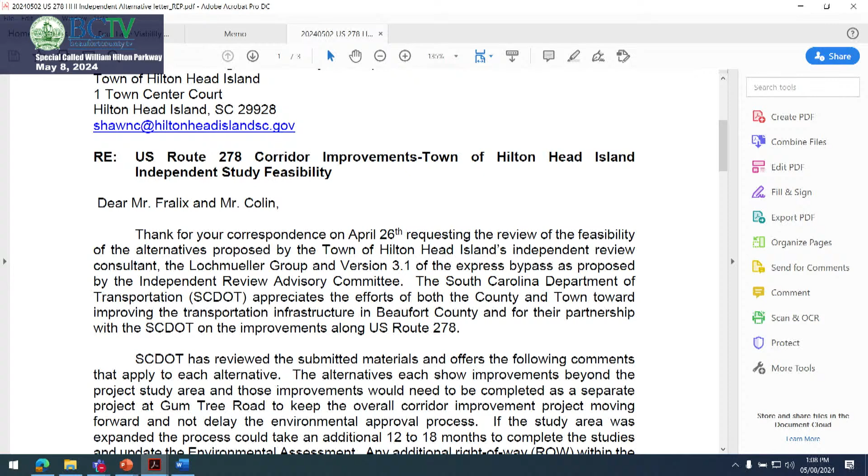The alternatives included number 1, the current Beaufort County proposed alternative. Number 2, which included bow ties, the roundabouts at Squire Pope, Chamberlain, and Spanish Wells, and Wild Horse Road. Number 3, the echelon or center turn elevated at one of 2 intersections in the Stoney community. And alternative number 4, the elevated bypass through the entirety of the Stoney community.

The other alternative, not recommended by Lochmueller but recommended for submission to SCDOT for response, was the Express Bypass, 3.1, that has been discussed for some time. That bypass impacts property to the southern portion of the traditional cultural property in the Stoney community and ties back into the Cross Island business route near Honey Horn, where Honey Horn and Coastal Discovery Museum properties are.

Those alternatives were submitted to SCDOT. They reviewed them in advance of the meeting and then provided feedback at the meeting on the alternatives. They also provided information related to bridge rehab versus a reconstruction or new bridge, which I'll share after we talk through this letter. They did a thorough review of the alternatives to provide technical evaluation and feedback related to feasibility or viability of the projects or alternatives to advance in the project.

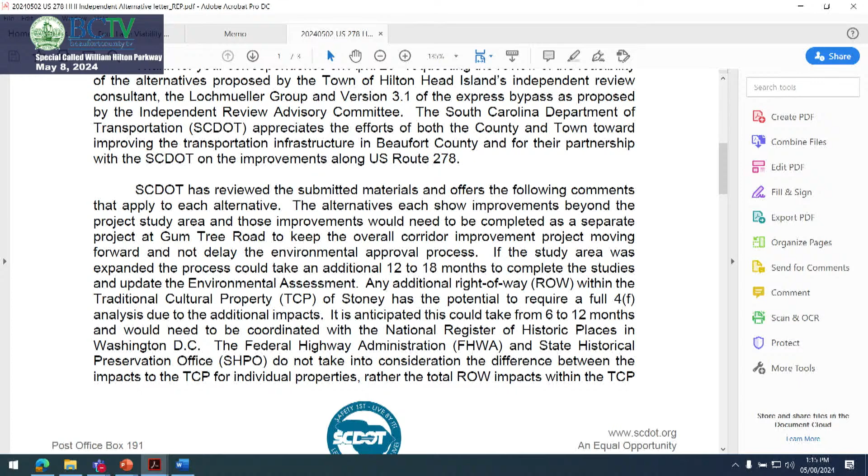There was sensitivity around the traditional cultural property. There is no distinction between town or publicly owned property and privately owned property as it relates to impact within that traditional cultural property designation and area. They've been coordinating with the State Historical Preservation Office to understand the difference between those impacts within the TCP.

As for specific feedback received on the alternatives, I'm going to go through - they had exceptions or concerns with alternatives 2, 3, 4, and the express bypass, and I'll run through those. It's the feedback that came directly from them. So there was discussion on May 1st.

This letter was drafted and submitted officially by their Deputy Secretary of Transportation and Chief Engineer. So alternative 2, which included the bow ties at Squire Pope and Spanish Wells roads, would require additional right-of-way, which Lochmueller provided in their presentation.

Due to the increase in right-of-way within this traditional cultural property, this alternative would be eliminated, or the feasibility of advancement would be really low.

They had concern with the potential issues around the roundabout volumes needed for dual lane, so it's maybe not just as easy as making a right to make a left - the volumes experienced in those areas would require some additional capacity in the roundabouts.

They thought the cost estimate and the construction duration were a little low to add those 4 roundabouts in, as it also increases the right-of-way phase of the project as well.

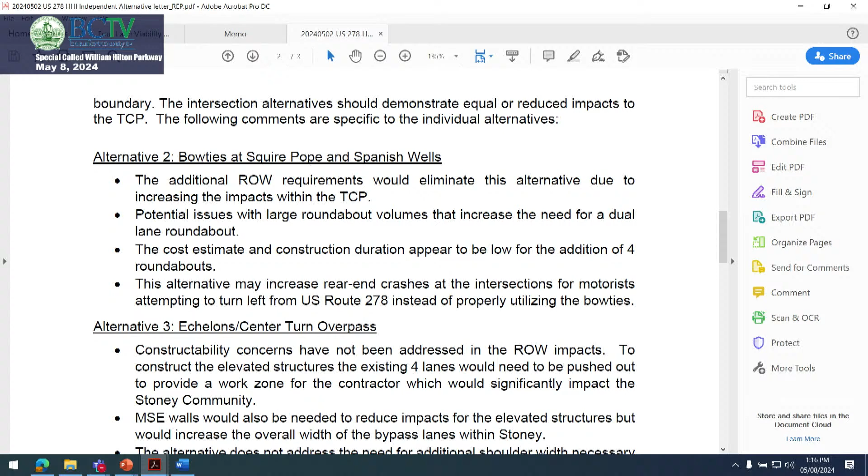They were concerned about potential increase in rear-end crashes at intersections for those not used to using this travel pattern to traverse through the area. So that was their feedback on alternative 2.

Alternative 3, the echelons and the center turn overpass - there was some concern that the elevated structures and substructure needed to support that would require additional right-of-way, since piers and columns would require that other travel lanes be pushed further out to the side.

And that would have impacted the Stoney community. So they're concerned about the TCP and additional right-of-way needs.

MSE walls, which are mechanically stabilized earth walls, would also have additional impacts for elevated structures and potentially increase the overall width within the Stoney community.

There was concern about the shoulder width, as you have the at-grade roadway and require shoulder width outside of those substructures to support the elevated area. That could have some additional impact.

They also thought the cost estimate for this elevated area for the echelon or center turn at one of the two intersections would cost more than what the estimate had shown from the Lochmueller evaluation.

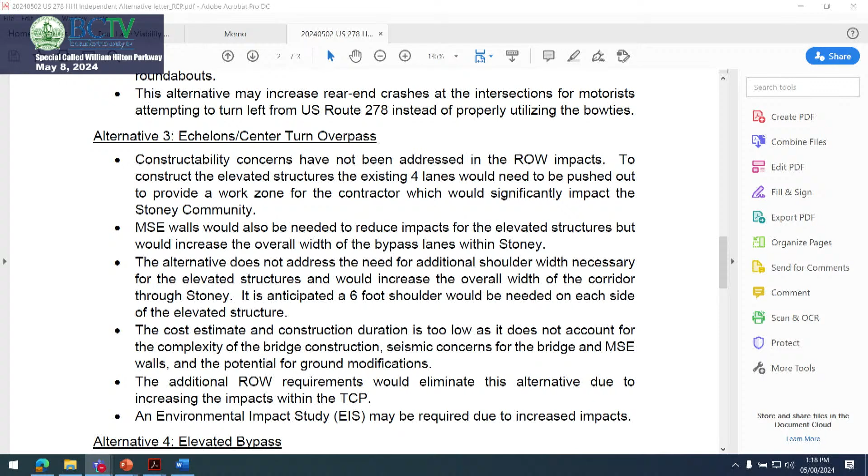The elevated bypass, again, it would begin at the causeway to Hilton Head Island and run through the entirety of the Stoney corridor, then tie into Business Route and the Cross Island Parkway.

Again, they had some additional concerns here with an elevated roadway - a substructure and superstructure requiring support that would squeeze additional needs and right-of-way impacts to the outside of the existing roadway.

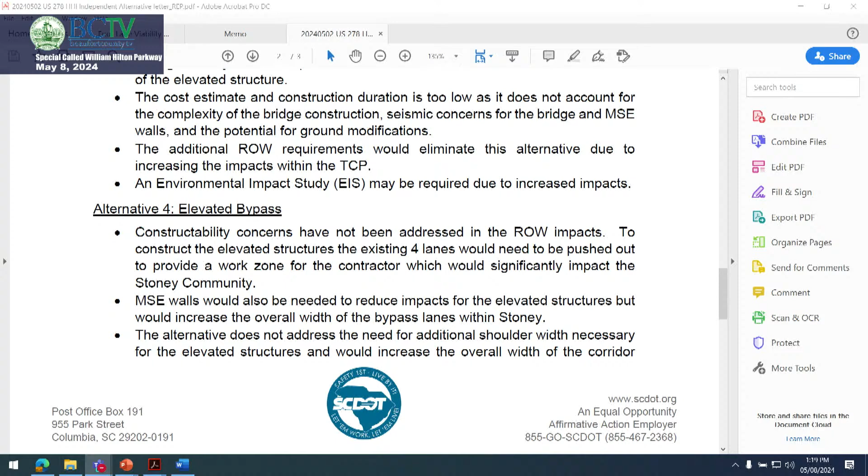This would also require work zones for contractors to operate, and the same applies to mechanically stabilized earth walls needed to support the super elevation, as well as shoulder width. There was concern these would require additional width within the corridor, requiring more right-of-way through Stoney.

They also thought the cost estimate and construction duration here were too low. If you recall, it was 425, 430 for alternative 1. It was 575... so even at a $150 million increased cost, they thought that was too low.

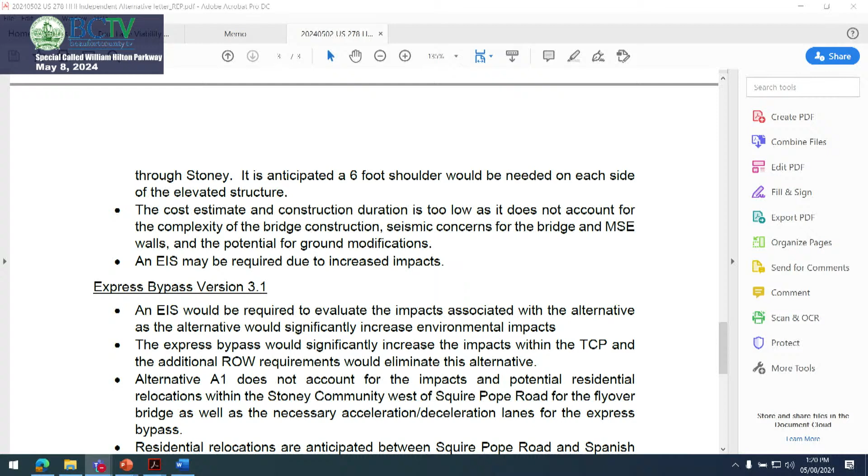This adds a lot of complexity once you start getting into superstructure and super elevation for an elevated roadway through that area, adding complexity to the construction period and the overall execution of the project. It also adds additional seismic concerns once you have that component, and they thought a full EIS might be required if this alternative was considered.

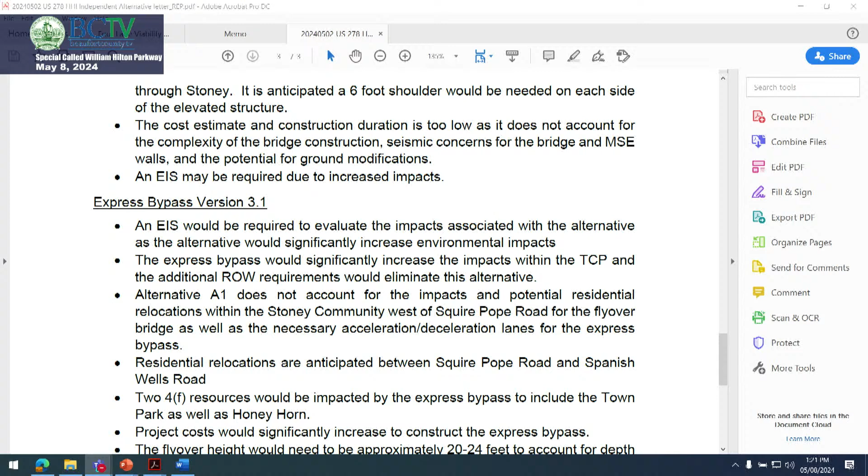Alternatives 2, 3, and 4 were rated very low on feasibility or viability to advance through the NEPA process and get through Federal Highways while minimizing impacts. Any questions on those? Those were the three Lochmueller alternatives they provided feedback on, before I go through the express bypass.

The cost estimate is based on the configuration included in the EA. It's a 6-lane bridge with two 10-foot shoulders, one in each direction, on the outside, and 6-foot shoulders on the interior — the 10-foot shoulders have been reduced. It includes a 12-foot bike and pedestrian pathway along the bridge, as one bridge with 6 lanes total.

It flies over Pinckney Island but does not land on it, due to safety concerns expressed by Fish and Wildlife. It includes a 6-lane segment once you land on Jenkins Island, continuing all the way through the Squire Pope intersection, which includes turn lanes — 2 turn lanes onto Squire Pope from Hilton Parkway and 2 right turn lanes off.

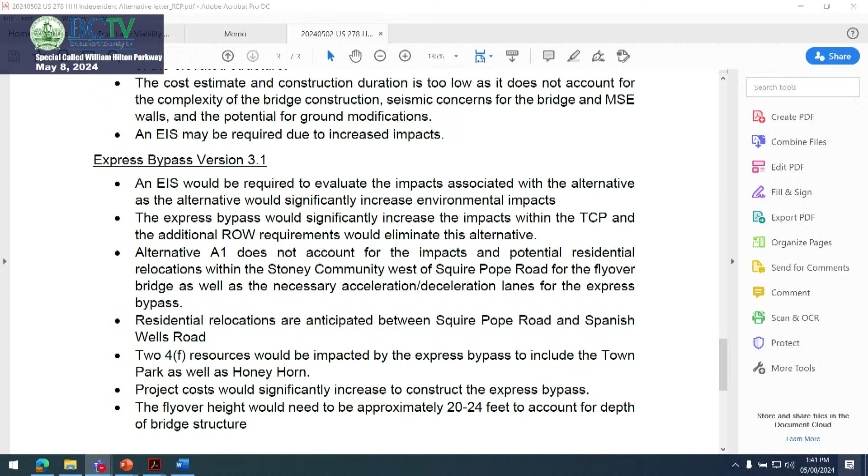As you can see, alternatives 2, 3, and 4 have very low feasibility to advance. There are statements from SCDOT that they'd be eliminated, as is the case with the express bypass that was presented. What was submitted was exactly what was submitted to the town for consideration, and this is a response from SCDOT. They don't believe that the express bypass is a viable option on many accounts.

Both property impact, environmental impact, cost, and time frame would not advance this. Federal Highways would likely reject this option if submitted due to the additional impact.

It would go against their objective of avoiding property impacts, minimizing property impacts, and mitigating in that order. This would have additional property impacts, potential relocations of residential, as you can see there, and would not be an alternative that they would advance.

Federal Highways would likely reject it if submitted because there are less impactful alternatives that have been developed. This is from SCDOT, and I've paraphrased a little bit from discussion related to that conversation with SCDOT. I'd ask Nate to share any of their professional engineering opinion on the feasibility of this alternative advancing.

Just, I don't want to rain on your parade, Sean, but if we are talking about an independent consultant doing the work and we open up the door to have in-depth conversations with SCDOT, and the consultant is privy to all this information, the views of SCDOT, now draw your conclusions.

Just so you know, Dietrich, the information we're going to be showing you from our perspective was before we have seen anything with that. Chad or Sean sent me an email with this document today, so we had not had any conversations at all. These would be our independent viewpoints on the bypass.

I do want to point out that I cannot modify the scope of work just at the direction of this committee. It was approved by town council. The committee's charge was for the work with a consultant to move forward materially consistent with the scope of work that they created. Before I would execute a contract amendment to evaluate this alternative, I would have to ask town council if they agreed. You made a recommendation on a scope of work to council, they approved it. You're changing the scope of work. I need to make sure that council agrees with that step. So I just want to make sure the committee is aware of that.

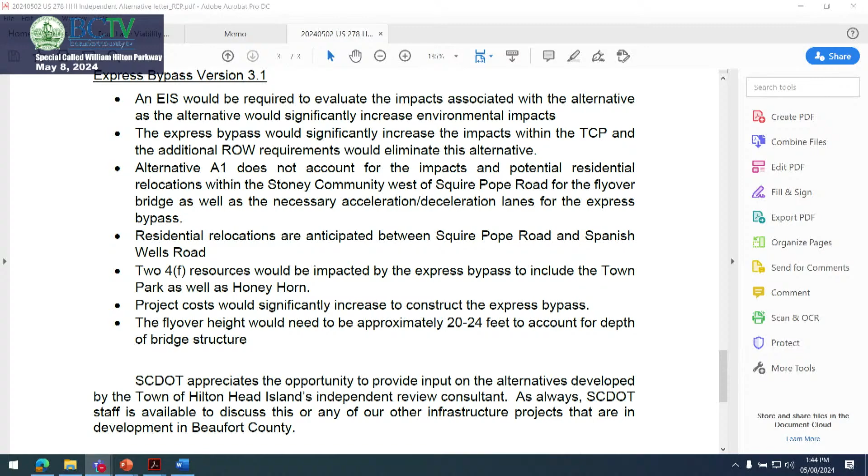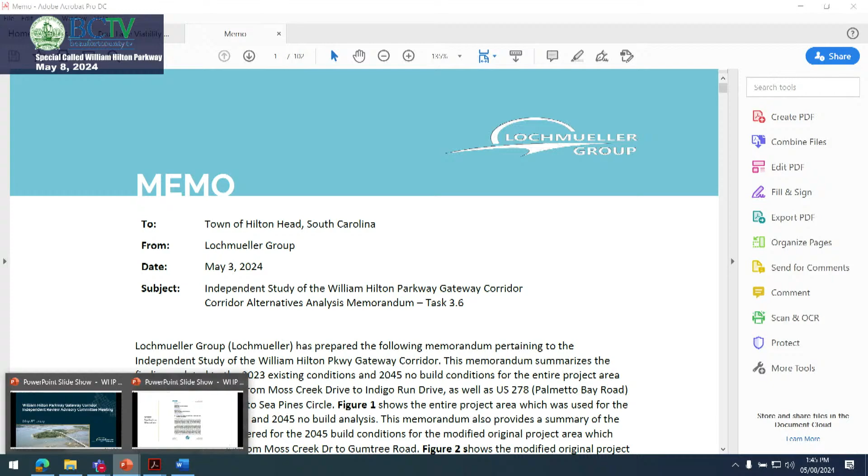So that's the letter and the response. I wanted to make sure I brought up the letter specifically on their letterhead because that's what's provided. I'm going to go through just very briefly a couple more things.

In addition to the alternatives which the committee asked us to vet through SCDOT, there's been some questions related to a bridge rehab versus a new bridge. We did ask SCDOT what are the design costs and construction implications related to bridge rehabilitation versus a new bridge, and they shared some feedback with us.

The existing deficient bridge, the eastbound Mackay Creek Bridge, is approaching 70 years in its life cycle. Bridge design and life cycle is about 70 to 75 years, so it's nearing the end, if it hasn't already, it's very close to the end of its life cycle. They said that bridge rehabilitation could be performed, but their preference is for a new bridge, and there's many reasons for that. As they looked at the substructure, the superstructure, and the bridge deck, there are significant concerns with all elements. The cost to rehabilitate the bridge would likely approach the cost of a brand new bridge.

A new bridge could be built with minimal traffic impacts. It would be built offline and constructed, and then there would be a slight transition to move traffic onto the new bridge before the old bridge would be demolished. There's some significance in that because it provides minimal impact to traffic operations during the construction period. They mentioned that a rehabilitation of the existing bridge could cause lane closures and delay to motorists during that construction period. And then finally, segmenting the project into rehabilitation of 4 bridges would create additional time on overall construction, likely increase project cost, and result in differing life cycles of the bridges that are there.

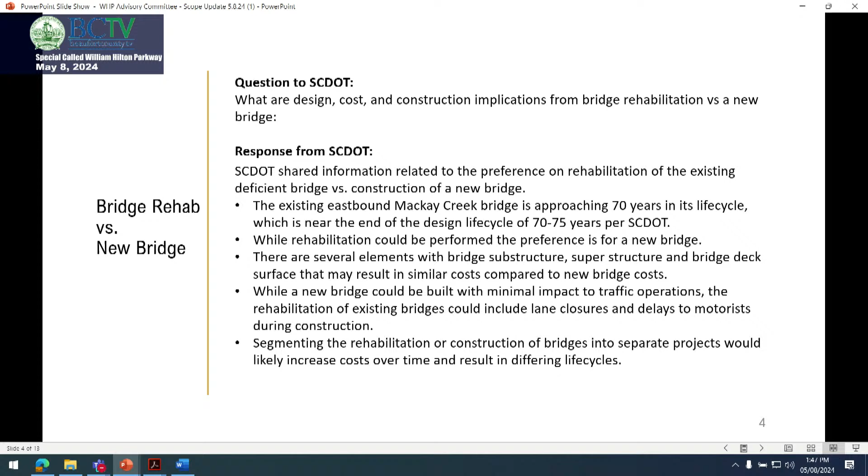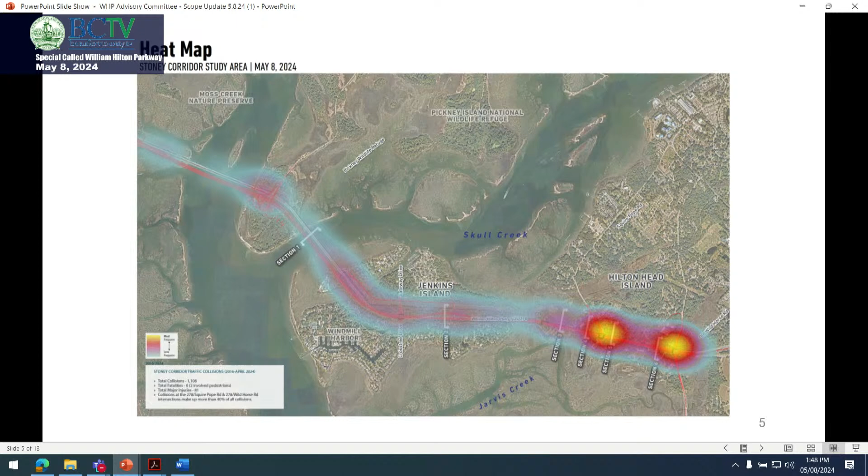I did want to point out a couple of other things. This is a heat map that shows traffic incidents or collisions from 2016 to 2024. As you can see, there's a significant amount as you go through the bridge corridor section, and then also as you get into the Stoney community.

Specific statistics in this 4.1 mile section are that over 8 years, there's been 1,108 total collisions, about 140 a year. There's been 6 fatalities, 2 involving pedestrians, and there's been 81, so about 10 major injuries a year in this segment. When we think back on why we're trying to advance a project, without a project, we don't have a mechanism to help provide some improvements in this area, including trying to slow speeds, some traffic calming, and have a safer transportation system through this area.

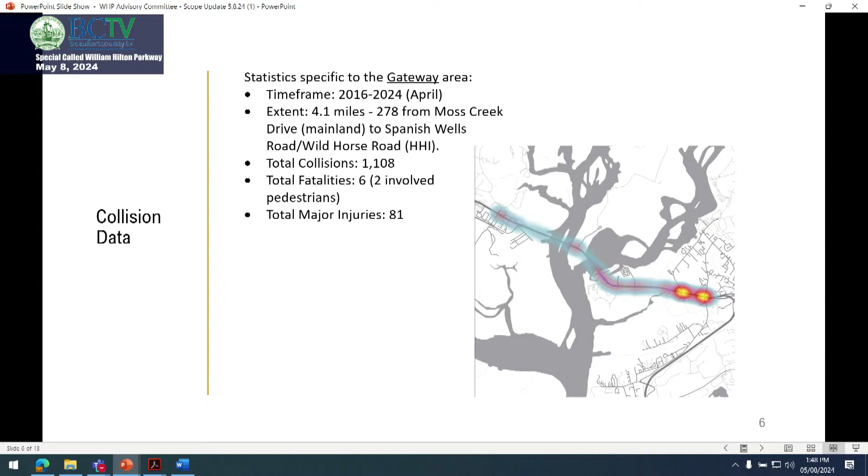I do want to make sure that we understand, again, the council authorized scope of work was to make sure that we had a consultant review all the assumptions, the methodologies, and come up with what they believe were alternatives to advance for this project.

They were encouraged to develop their own ideas and recommend their own alternatives. I think they've done that. And this was to be independent. The proposed plans have to pass NEPA. This was right from the ordinance adopting the scope of work. And that any additional impacts, including safety and other items that are considered by federal highways, would need to be considered.

So I think what Lochmueller has done is look at the alternatives and also the viability and ability for them to move through the NEPA process, and be alternatives that would be supported by federal highways. And then the final thing is anticipation that this would not take longer than about 6 months to complete. And then there's all of the scope tasks that are below that.

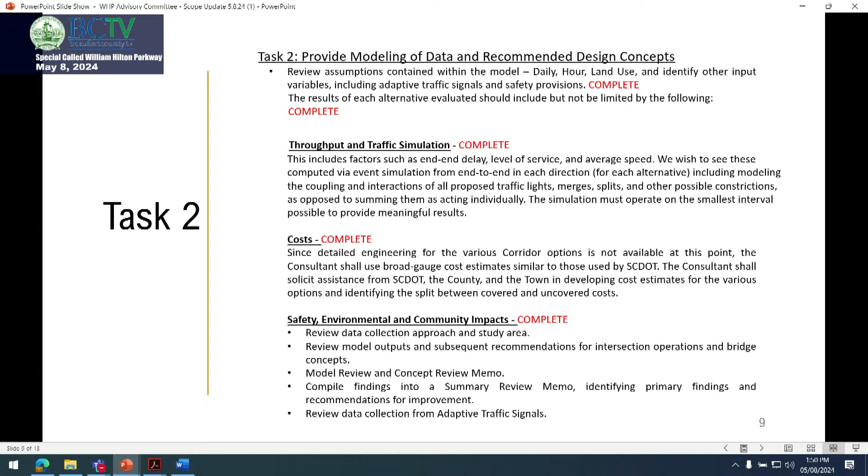I'm just going to go through this at a high level. All items in task 1, other than the ongoing meetings and updates, have been completed. In task 2, the modeling data and recommended design concepts have all been complete. In task 3, the model and

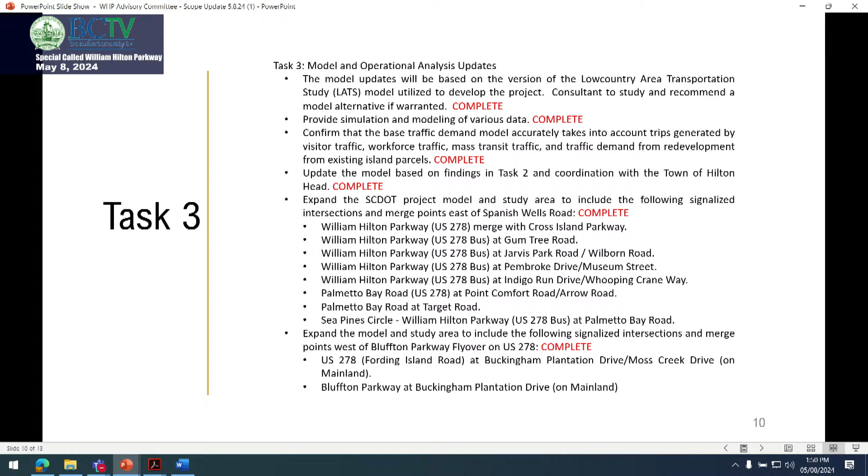operational analysis to lead to the recommended alternatives from Lochmueller have been complete. They have also expanded the study area beyond the Spanish Wells intersection to Gumtree in this modified project area, but also have added the other intersections downstream, both on the business route and on the Cross Island route to Sea Pines Circle. So it's been complete. We don't have all the results on that next segment, but they have expanded it.

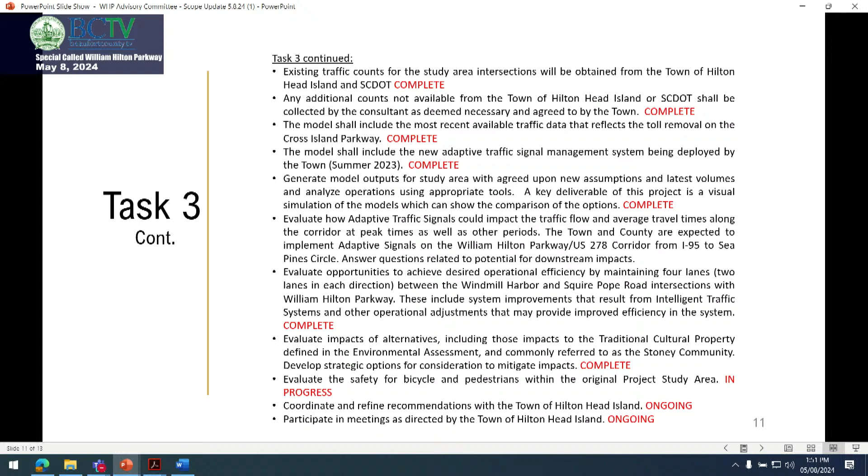Task 3, with additional items here that have been considered, adaptive traffic signals. They've looked at and provided you model outputs from the Synchro that they've run. They've got data from the VISSIM at the last meeting. They've looked at impacts to the TCP and have provided you 4 alternatives that they believe were viable to advance.

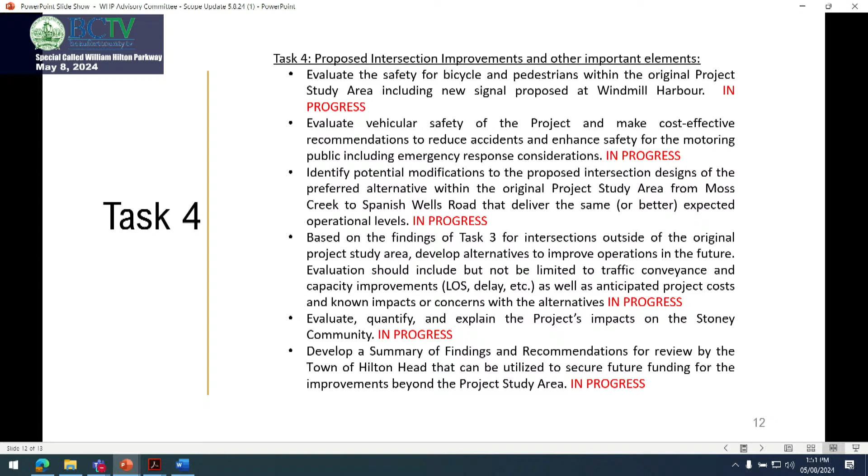They're now moving into task 4. The contract was segmented to try to get information from the Moss Creek through the Gumtree area, because that's the area that's slightly larger than what was included in the NEPA process. And so I think they've provided that information consistent with the directive and the scope of work that was in the contract. They'll continue on task 4 to look at some additional elements and then the downstream impacts to those other intersections. And then task 5 would be delivery and presentation of their final report and findings.

So I wanted to provide that information to make sure the committee knew where we're at, the community knew where we're at, that we're tracking, Nate and I are tracking the scope of work and progress kind of in lockstep, me from what council and the committee approved, and then Nate and I from the contract that we've executed for them to do the work.

Any questions on what I've presented? I didn't mean to go so long, but I think that's all important information to have on the table. Any questions? Okay, great, thank you.

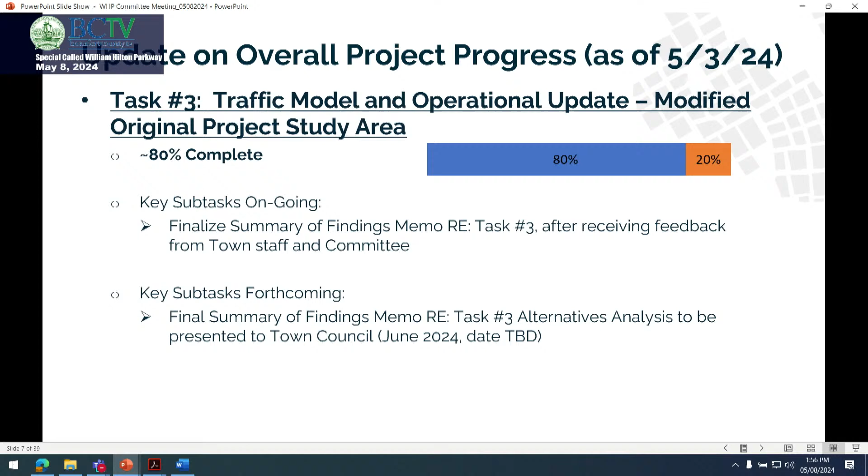As for intersections downstream of the Cross Island Parkway, we've begun those based on direction received from town staff on May 1st, using alternative 1 for the reasons Sean outlined in his portion of the discussion today. With the following modifications: in lieu of dual auxiliary turn lanes at Squire Pope Road for the eastbound left turn and southbound right turn movements, we'll evaluate the impacts of single turn lanes instead, as well as modifying the location of the median access into Crazy Crab. The purpose of this is to minimize impacts along the north side of William Hilton Parkway, west of Squire Pope Road.

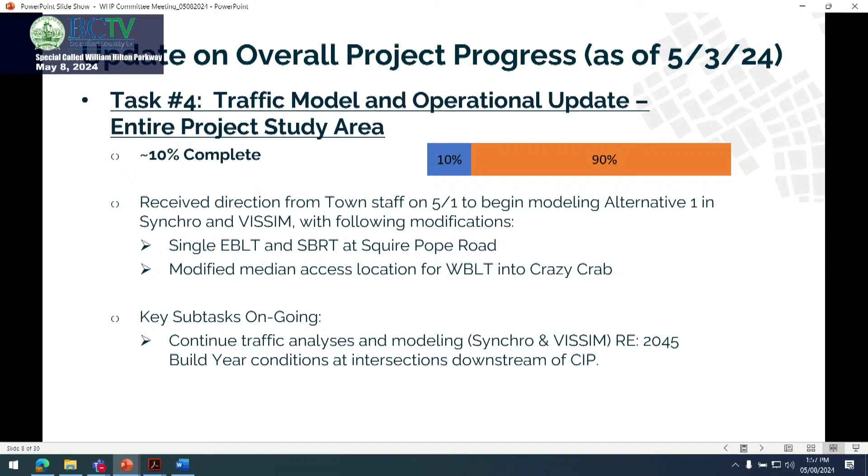Task 5 is just a summation of everything, preparing a formal traffic safety and operations report that would be submitted for review to council and then ultimately presentation. So that concludes the project progress update. Does anyone have any questions on where things stand?

I'll move forward into task 1.8 in our scope addendum, which has been approved by the committee. Town council was asking us to provide a very high-level cursory overview of the feasibility of seismic retrofitting or structurally rehabilitating the existing structures, as compared to constructing new bridges. Again, stressing that this is just a review of information, not for us to do any redesign, not to critique anyone's calculations or get into fine details. Just really focus on, truthfully, the life cycle cost analysis in the US 278 bridge seismic study completed by the DOT and their design team, done by KCI, and I believe another sub-consultant assisted them.

That was dated April of 2020, so it's about 4 years old to date. We received a copy of that a few weeks ago on April the 15th. It was a very lengthy document, approximately 1,800 pages in total. The narrative and summaries were approximately 100 pages, with the remaining being data outputs, very detailed calculations.

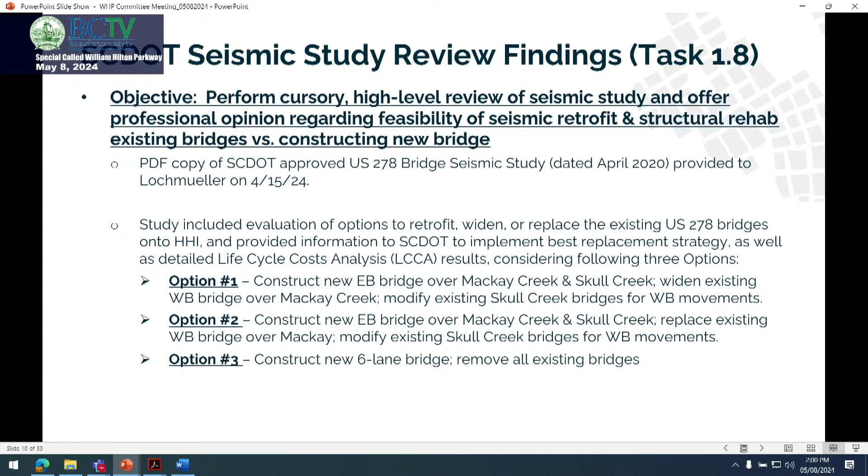Within the study, they really refer that eastbound structure as a lifeline, so that traffic to and from the island can be maintained during rehabilitation. The sequence that they assumed was that the eastbound structure would be constructed first, while the existing lanes on the 278 bridges remained in place.

Once the new eastbound structure is built, that would allow 2 lanes of travel in each direction. The traffic would be moved over to that to allow, again, equivalent 4 lanes to and from the island. And then rehabilitation efforts can begin on the existing structures.

Once the rehabilitation efforts are completed, then the eastbound new structure would be reconfigured to allow for 3 lanes of travel with shoulders on either side, a breakdown lane and an interior shoulder. And then the rehabilitated structures would provide the 3 lanes in each direction as well as shoulders.

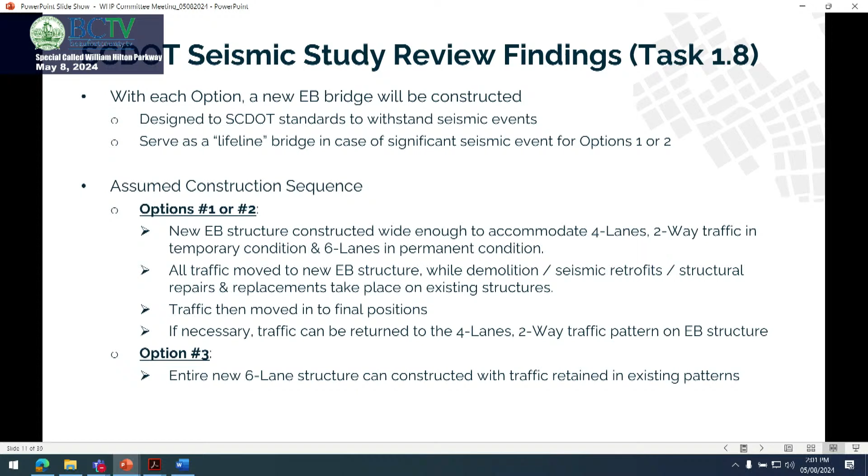And option 3 is a new 6-lane structure, similar to what the DOT's alternative is.

The next few slides just provide cross-sectional views of what was shown in the study. We did not create these, but I thought that they would be beneficial just for everyone to get a feel for what they were from a cross-sectional view.

Options 1 and 2, as I said, were very similar in that they both assumed this lifeline structure. So at the top, you can see in a temporary condition, that new eastbound structure would be built wide enough to accommodate 2 lanes in each direction while the rehabilitation efforts are taking place. And then once those are completed, you can see at the bottom, they would allow 3 lanes of travel with shoulder widths.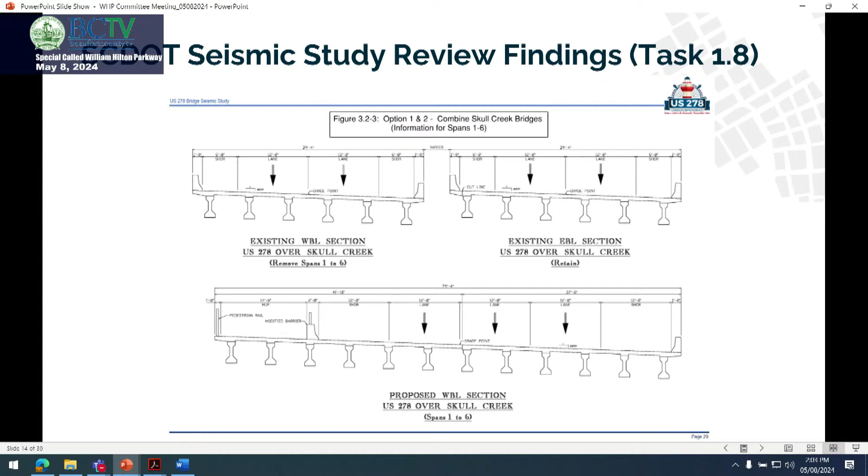The illustration here shows what's proposed for the first 6 spans of the structure, starting from the west end of the Skull Creek bridges moving east. The eastbound lanes would remain in place, where the existing westbound structures would be removed. And then you can kind of see, if you bring a line straight down, where the widening takes place to ultimately allow the 3 lanes westbound, shoulders, and a multi-use path.

For spans 7 through 26, you can see in the existing condition they're very close together. It would be joined by new concrete deck joining them, and then allowing the 3 lanes of travel westbound and then the multi-use path.

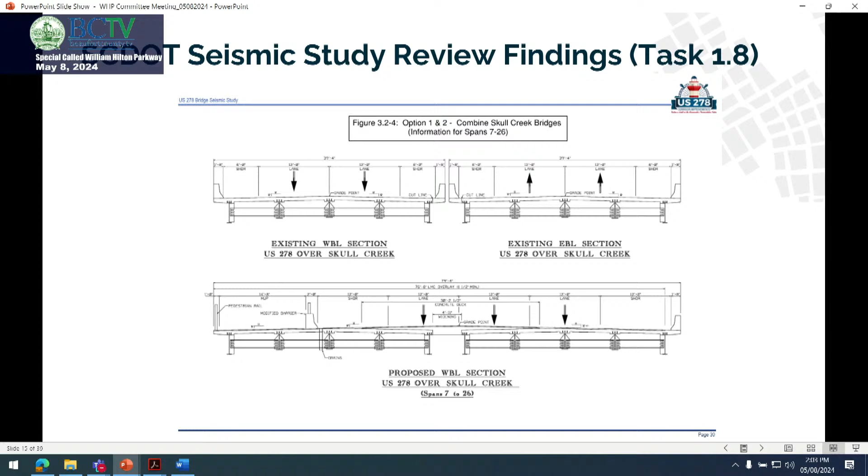Option 3 was the new 6-lane bridge. You can see the break line here if you just imagine this coming up to here. So as Sean was describing, from right to left, which would be south to north, you have the multi-use path, a shoulder, 3 lanes of travel, interior shoulders, 3 lanes of travel, and a shoulder on the other side.

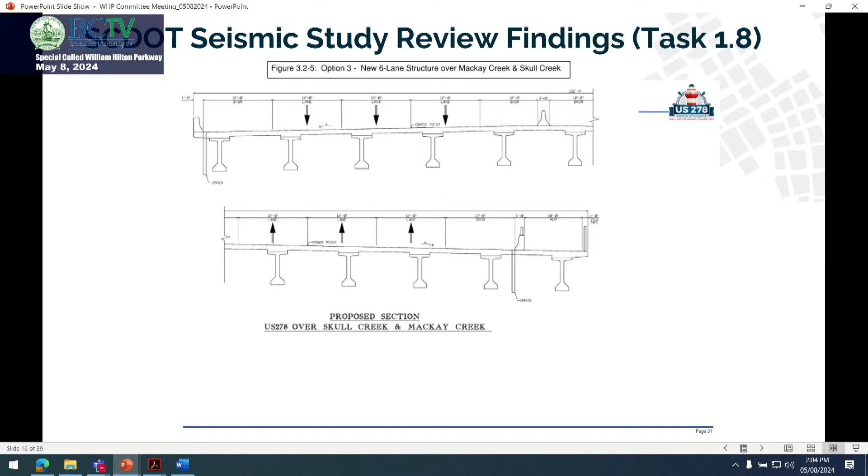Before I move further, I just want to pause. Does everybody understand what the study assumed for each option? Okay, let's move forward then.

So some of the key findings that we noted, these are not our opinions, these are just things we pulled out of the study as we wanted to bring to everyone's attention.

The existing bridges were designed and constructed prior to current seismic requirements from SCDOT's perspective. So therefore, all existing bridges are considered inadequate from a seismic perspective.

The grading from the seismic perspective are 2 different criteria. One would be the functional evaluation earthquake, or the FEE, that's a lower magnitude earthquake event that has a higher chance of occurring. And the most conservative design threshold would be the safety evaluation earthquake. That's a higher magnitude earthquake that has a lower chance of occurring.

New bridges can be constructed to meet SEE requirements. And the ability for existing structures is based upon some information on the slide I'll show in the next couple of slides. But I did want to note there at the bottom that given the critical nature of the 278 bridges, they are considered an OC1, and that's just a rating that says that any rehabilitative efforts must meet the minimum FEE design thresholds. The do nothing is not an option.

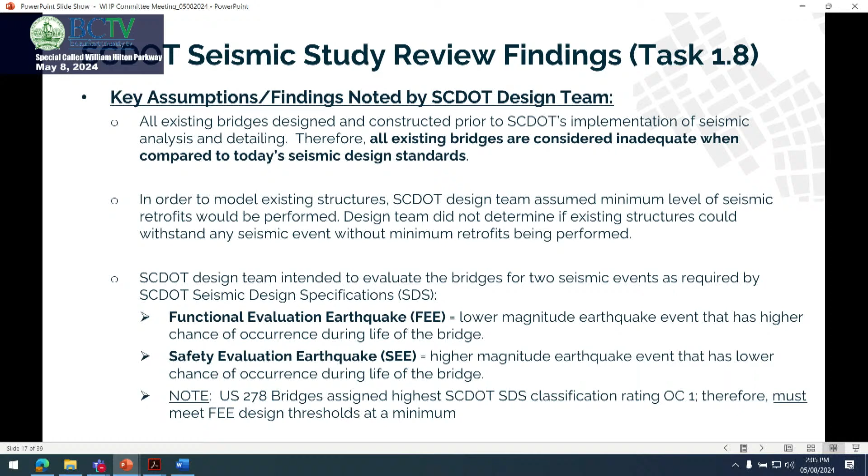They also looked at the soils conditions underneath the existing bridges, and what they found was that they exhibit a potential for liquefaction to occur, and that's essentially allowing for roadways to settle, slide, or collapse if a seismic event that was at or above an FEE level took place.

And in order to mitigate that, what would be needed is essentially bringing it up to SEE levels, and that would require additional foundations, deep soil mixings, or others. And the design team noted that the cost that would be required to bring that up to an SEE level, not only from a cost perspective, but also greatly increases the environmental disturbance.

With the DOT's concurrence, the design team moved forward in their study to only see FEE level seismic. So therefore, anything that we talk about with retrofits does not meet SEE requirements with the modifications. Again, as I said, new bridges can meet that SEE requirement, but in this case, the 278 bridges will only be able to meet that FEE at best.

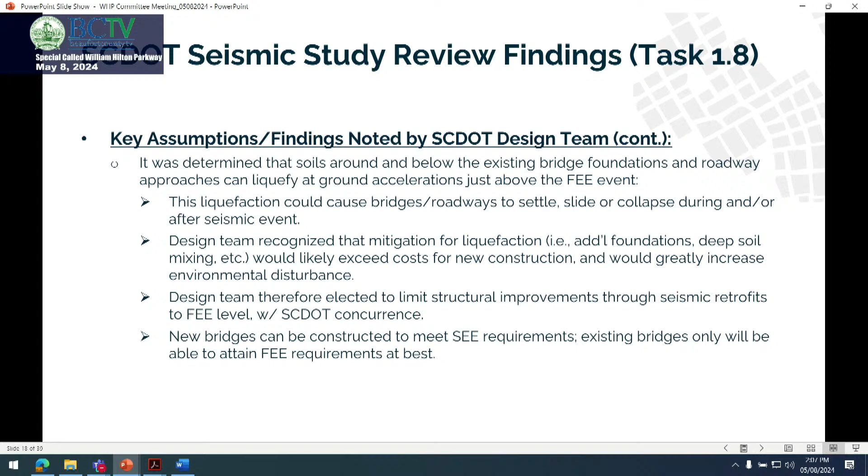And I think maybe if you recall a couple of meetings ago, the county had shared a statement that the existing bridges wouldn't be able to meet seismic standards, and we wanted to get the confirmation as to what that meant. I think that's what they were referring to, was that it would vary from a cost perspective and impacts that it would just not be possible.

So the key findings in the study, what we really focused on was a life cycle cost analysis they put together. Of course, this was completed in 2020, so they're using 2020 dollars. They use an annual inflation rate of 2%, which, as we know, that's pretty low considering what we went through the last 4 years.

When they're making their inputs for their model to life cycle cost analysis, they did coordinate with local contractors who have experience with heavy construction over waterways, and the feedback that they received is that it's approximately 1.5 to 2 times more expensive to rehabilitate existing structures as compared to building new when you're over water.

So at the bottom, you can see what the results were for the 3 options. We have initial construction cost, which would be the cost of any new portions of bridges, widening the existing bridges that remain, demolition cost, and rehabilitation of the bridges that were retained. The future construction cost accounts for replacing the rehabilitated structures once they've reached the end of their useful lives.

So in option 1, for example, as I said, had assumed the rehabilitation of the west end structures, so it's 85 million. It's saying that, okay, maybe 130 million roughly at the beginning, but when they reach the end of their useful life, then you're going to have to pay 85 million with these estimates to replace them.

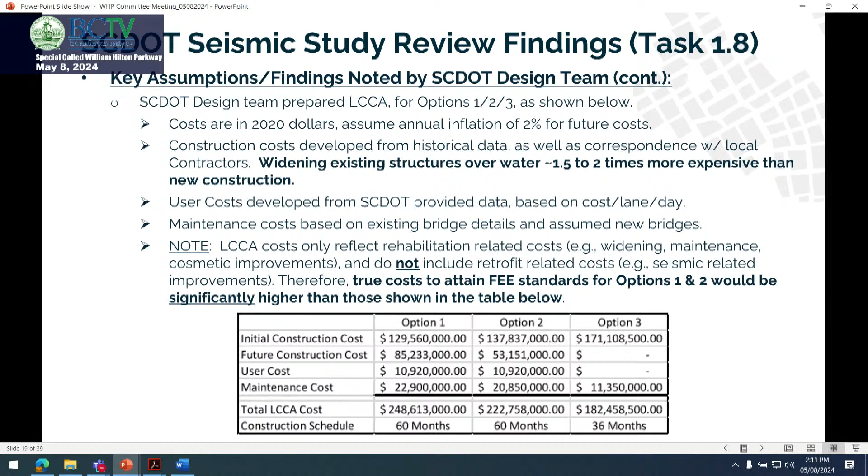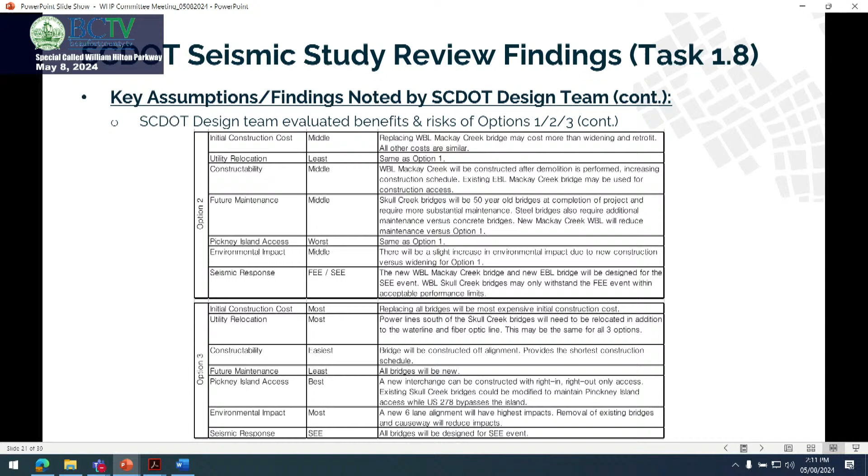The design team also went through a benefits and risk matrix on a variety of different topics for each of the options. For options 1, 2, and 3, we reviewed those from a cursory perspective and agreed with the findings.

So these are our observations as we conclude. Again, we did not get in and do any type of redesign, we didn't do any calculations. We just focused on the life cycle cost and looked at their methodologies. In summary, we agree that the findings are valid and they appear to follow standard engineering practices.

What I noted here was that we look at this 60 months - that's just to implement option 1, but it does not include the time that would be spent whenever you have to go back up and replace the bridge that you rehabilitated.

Just curious, just to ask the question: on option 1 and 2, that 60 months, does that include the seismic work as well?

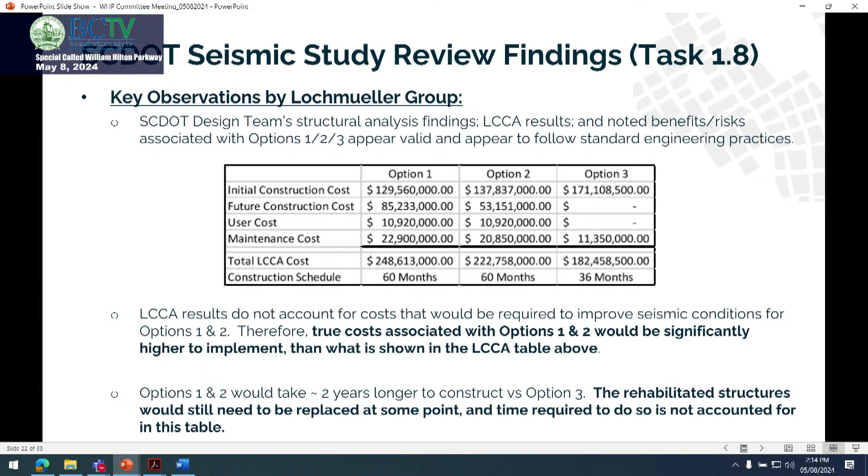There's a cost that you can't include, and that's a cost to the economy. Every place they've rehabbed a bridge, they've found they had to restrict traffic. So instead of 2 lanes, we might be down to 1, and instead of an hour, it might be 3 hours to get across the bridge. I look at Interstate 91 over the Deerfield River in Massachusetts. It was down, and there were no tractor trailers going across that bridge on the interstate because they had to restrict due to vibration with 2 lanes. So you have to add into that, which is unknown, what it's going to do to our economy.

Couple more slides related to this, and Sean spoke about this. When we read through it, they're reaching 50 years of age. So best case, approximately another 25 to 35 years for rehabilitated structures, whereas compared to new, with new design practices and proper maintenance, a new bridge could last 75 to 100 years.

Let me move this down a little bit so I can see. There was a question about whether this whole discussion was to see if it was feasible, or just simply a temporary condition. In our opinion, even if you looked at option 1, which had the least cost from a front end standpoint, that cost does not include what the seismic requirement improvements would be. So that delta you see between the approximately 130 and 170 would decrease substantially from the front end, and then you still get into having to replace that at some point.

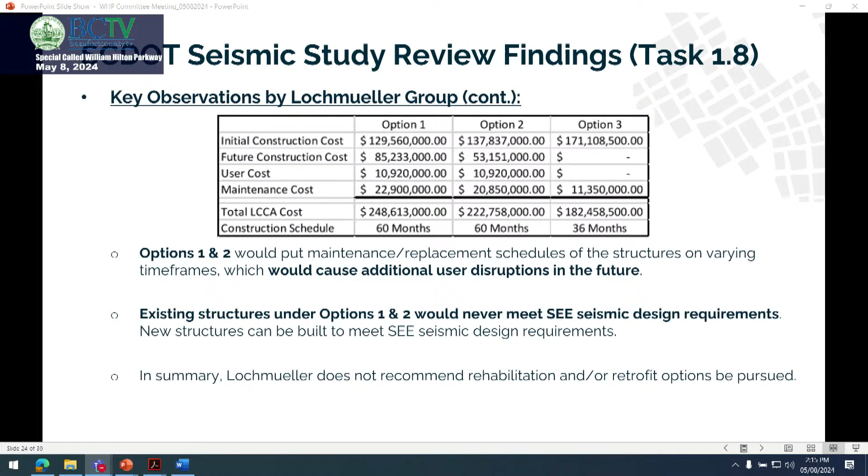Options 1 and 2, as Sean mentioned, put this on different maintenance schedules, and whenever you have to go back and replace it, you're causing disruptions to the public again, whenever it's deemed feasible to replace it. In summation, options 1 and 2 would never be able to meet SEE design requirements, which are the current best design practices, whereas a new structure would be able to, with a lower overall total life cycle cost and on a shorter time frame. So for all these reasons, we do not recommend pursuing rehabilitation or retrofit efforts as compared to building new.

Does anybody have any questions with that? Okay.

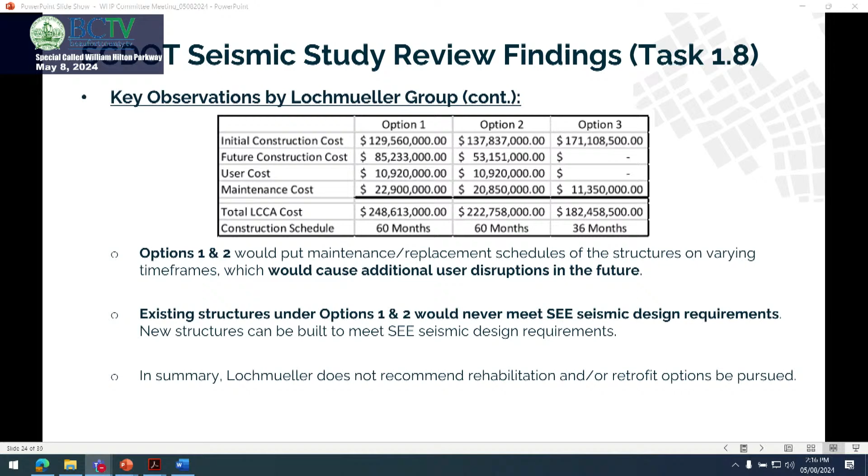The next topic we'd like to get into is task deliverable 1.3.3, which was asking us to provide our professional opinion on whether there was an opportunity to maintain a 4-lane section of Hilton Parkway west of Squire Pope Road. I'm going to allow Michelle Romine of our team to go into more detail on that.

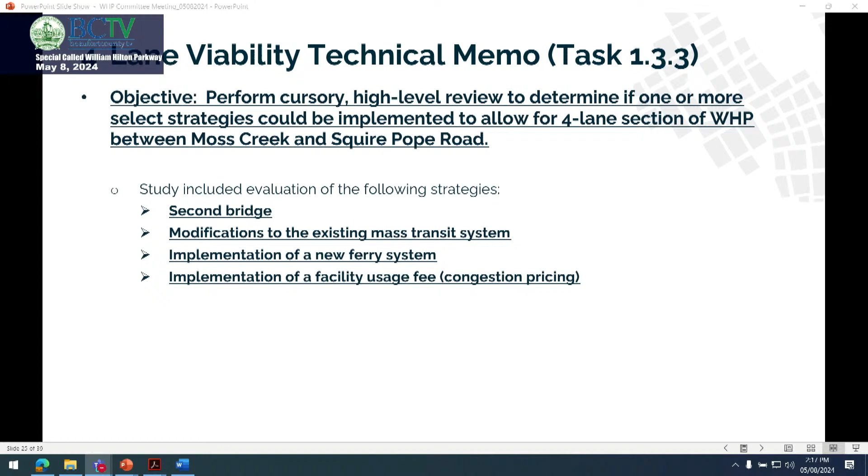Good afternoon. As Nada mentioned, as part of our scope we are tasked to provide a high-level review of whether a 4-lane section could be maintained between Moss Creek and Squire Pope if one or more select strategies were implemented. These strategies include a second bridge, modifications to the existing mass transit system, implementation of a new ferry system, and/or implementation of a facility usage fee, commonly known as congestion pricing.

As a basis for this high-level review, we revisited the existing and future travel times along this corridor. We used VISSIM, a microsimulation tool, to calculate the travel times. Currently it takes about 19 minutes to travel eastbound along US 278 between Moss Creek Drive and Indigo Run during the AM peak hour, and about 21 minutes westbound between Indigo Run and Moss Creek during the PM peak hour. This section of road is about 8.2 miles long, so the speed along the corridor is about 26 miles an hour during the AM peak and 23 miles an hour during the PM peak, both well below the posted speed limits of 45 and 55 miles per hour.

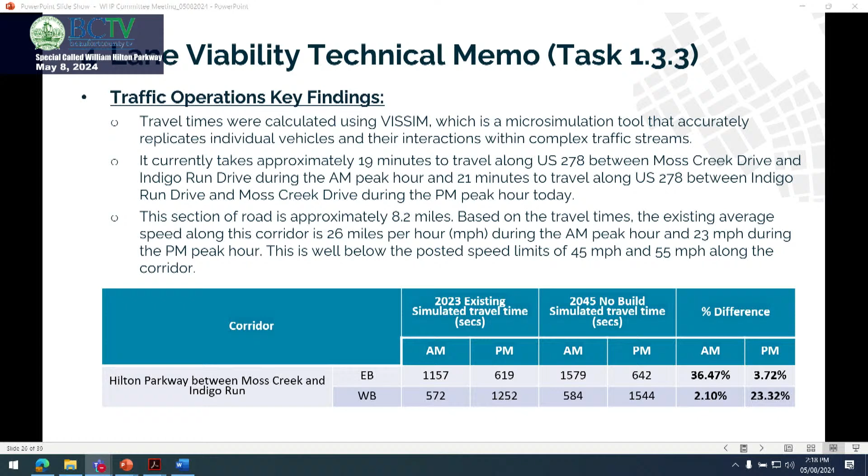So in summary, we found that there's already significant congestion in this area. This is experienced by you today as part of your daily lives, and it's expected to be even worse in 2045 with our forecasted growth.

We looked at the traffic models and found that the 2023 existing volumes would need to be reduced by about 30% in order for the current 4-lane configuration to operate acceptably. And then the 2045 traffic volumes would need to be reduced by about 40% in order for the current 4-lane configuration to operate acceptably.

To me, there's a difference between traffic flows on the bridges and traffic flows on the island. As I understand it, the bridges are not the problem; it's the lights on the island and Windmill Harbour. Have you run the models, assuming that 1 lane is good for 1,500 cars per hour? So 3 lanes on the bridge would be good for 4,500 cars per hour during the peak hours. Have you run that scenario at all?

And separating out the bridges from the flow of traffic on the islands, coming onto the islands or off the islands, we ran the models based on the existing lane configurations and the volumes that we have. We included all of the traffic signals because those play a role in how the traffic operates. As you mentioned, the signals can stop people, so we included the entire area. From there, we determined and backtracked the traffic volumes to see at what point all of the intersections start operating acceptably. That's how we determined this 30 to 40% range in reduction.

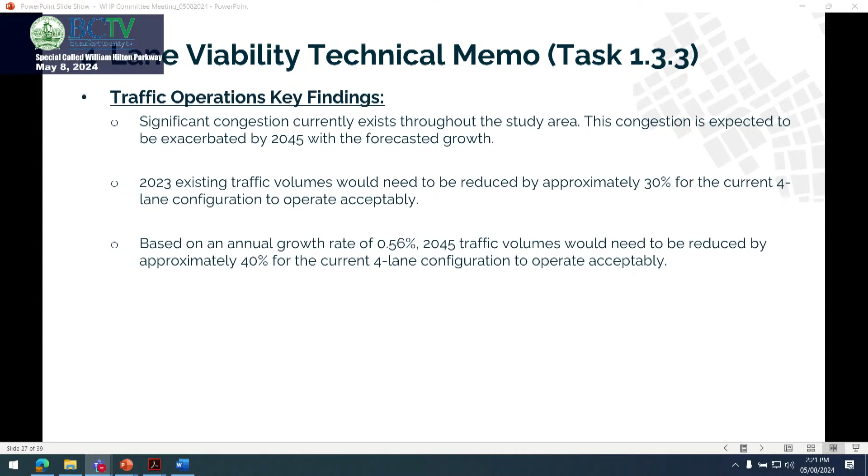So we've spoken about a second bridge in the past. The second bridge has been discussed locally for quite some time now. And as we've discussed, a second bridge could take up to 20 years to construct once all of the studies and planning and design are complete. This second bridge has not been fully vetted or really even started yet, so it would take quite some time to move this forward. And as we've shown in the past, the operating conditions are already congested today, and in 2045 they're only going to be worse. So our focus and our scope was to mitigate the existing and forecasted conditions. And as we've shown, there's going to be a lot of congestion. So it is our opinion that a 6-lane section is needed independently of a second bridge.

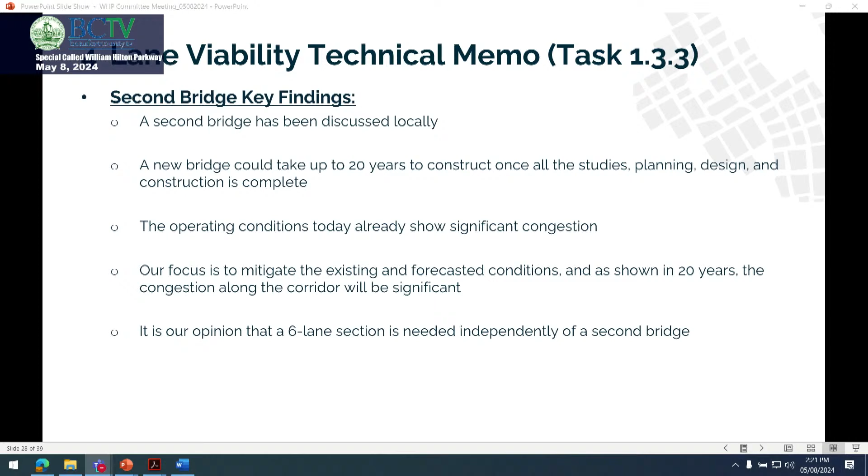We also looked into whether any modifications to the existing transit system could be implemented in order to maintain a 4-lane section along US 278 between Moss Creek and Squire Pope. There are several transit systems currently provided, including the Palmetto Breeze Trolley, which is a seasonal service, an on-demand van service, and a shuttle for beach parking.

Based on the data that we have, we found that transit accounts for a small portion of the total regional trips. And in order for the transit system to be more effective, it would need to be much more robust. This includes increasing the number of days per year that the service runs, as well as the number of times per day that each service runs.

We also found that as of 2021, transit only accounted for 1% of the regional mode share. Mode share includes trips made by passenger vehicles, pedestrians, transit, and more. So it's clear that if transit only accounts for 1% in this area, it is not highly utilized, and it would need to grow exponentially in order to reach that 30 to 40% reduction in traffic needed to maintain a 4-lane section.

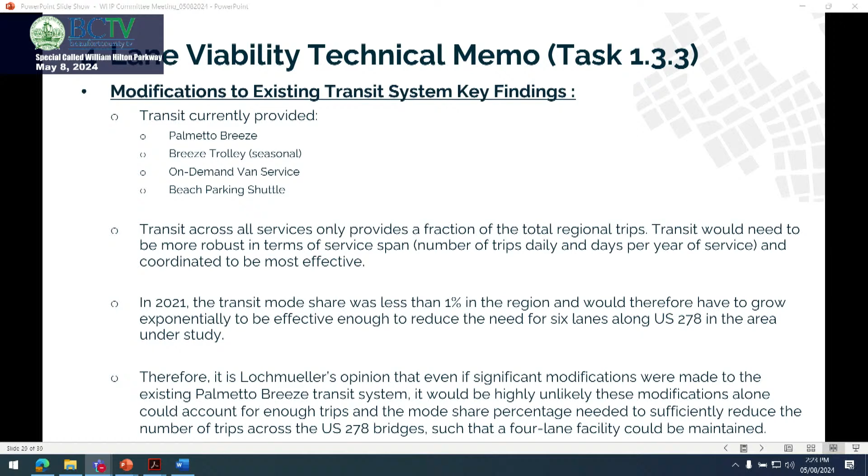We looked into a ferry system, as well as the facility usage fee. Similar to the second bridge, to our knowledge there's been no formal studies of a high-speed ferry system that have been initiated. Therefore, it's our opinion that it could take between 10 to 15 years for a high-speed ferry system to be fully operational. And even still, if and when a ferry system could be implemented, it's highly unlikely that the resulting reduction in traffic would allow for a 4-lane section. Again, we're looking for between a 30 to 40% reduction in traffic.

Now for the facility usage fee, South Carolina state law currently prohibits tolls or fees from being implemented on any existing roads. Only new roads can instate fees and tolls. That being said, if a facility usage fee could be implemented, the fee would largely impact commuters, not necessarily tourists. Commuters largely enter the island for work and account for the majority of traffic during our AM and PM peak hours, where we see most of the congestion. But again, even still, if a facility usage fee or congestion pricing could be implemented, it is still highly unlikely that the resulting reduction in traffic would allow for a 4-lane section to be maintained.

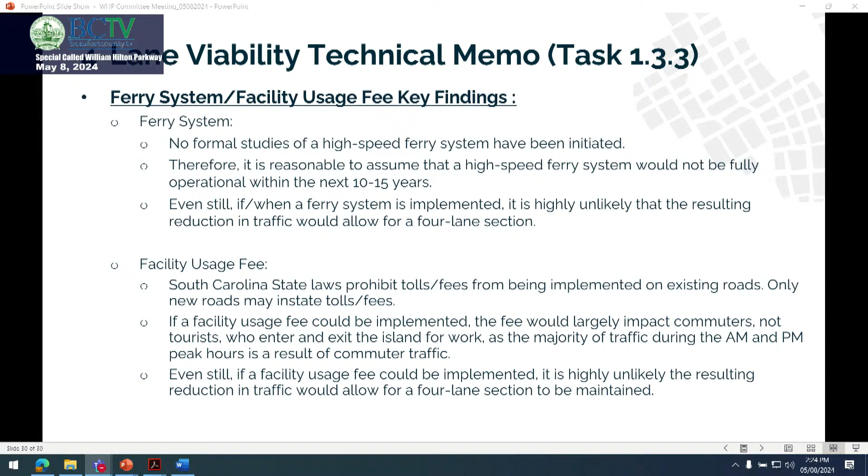So overall, to recap everything we looked at in the 4-lane viability memo, we found that in order for a 4-lane section to operate acceptably, the total reduction in vehicles within this area would need to be between 30 to 40%.

While implementing all of the different types of strategies would certainly help slow future traffic growth and should still be considered, it's our opinion that even if all of these strategies are implemented, the reduction in vehicles would not reach 30%. And speaking to what Nate mentioned beforehand, these strategies would still not address the structural issues associated with the existing bridges. Therefore, it's our opinion that all of these strategies should not be considered as viable alternatives, but they would not be able to solely address traffic congestion or mobility-related concerns along this corridor in order to allow for a 4-lane section to be maintained.

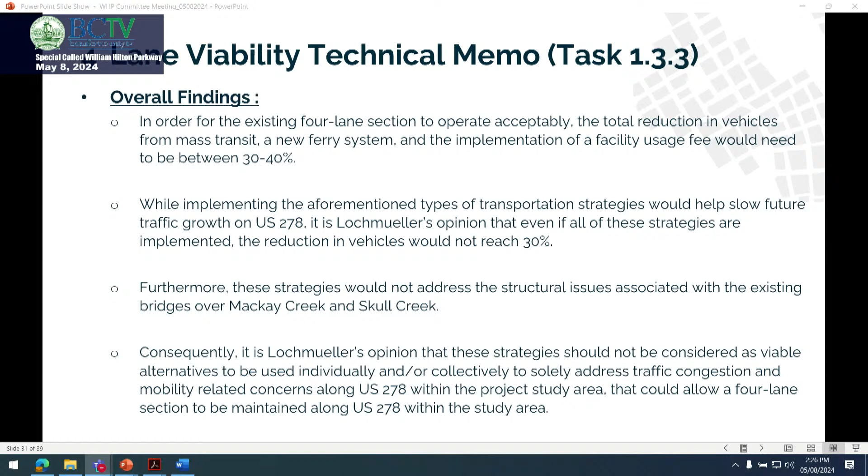So before we get into the next section, are there any questions? Go ahead, Michelle.

As Nate mentioned earlier, it's not part of our scope, but we looked into the southern bypass as a cursory overview. From a traffic perspective, it was discussed at the December 12th committee meeting that one of the biggest priorities was to limit right-of-way, whether public or private. That was the guidance given to us when selecting our potential alternatives, which we've already presented to you. This topic was again re-emphasized at the March 27th committee meeting.

Looking at this at a very high level from a traffic perspective, the southern bypass is not anticipated to improve operating conditions at Gumtree Road. That's because there's no effective way to bypass Gumtree. Our fourth alternative, the elevated bypass, does bypass Gumtree. So that's a key difference between our alternative 4 and this southern bypass.

We also found that while the bypass has the opportunity to remove most of the through traffic from US 278, if the bypass remains at grade, it will still need to cross several streets as shown below, which reduces the effectiveness of the bypass. We've circled a few areas in this image, calling out the different locations of the local roads that the bypass will still need to pass if it's at grade.

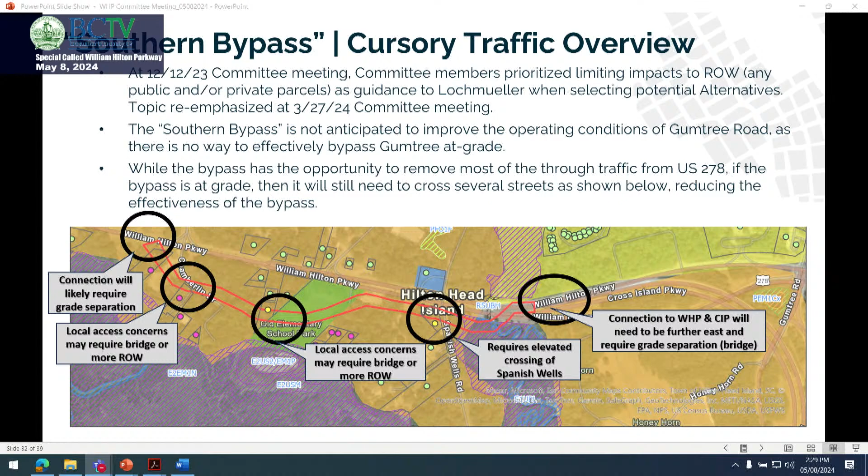Lauren, would you like to go ahead? As Michelle mentioned, we've looked at this at a high level, and as you can see there, we identified the existing parcels, both publicly owned and privately owned, and where we felt there would be full takes, access concerns of that nature, as well as at the Jarvis Creek area. Obviously, you can't go at grade through Jarvis Creek, so there would need to be a bridge there, and to tie directly to the Cross Island, that bridge would have to extend over the existing William Hilton Parkway to tie directly into the Cross Island, as the concept is designed to do.

From that point of view, Nate, you can go ahead and go to the next slide. We've done a cursory evaluation here. From a feasibility perspective, it can be constructed. There are just some concerns that would need to be addressed, as far as actual horizontal alignment, making sure you're meeting design speeds with proper curve radii, and more particularly the tie-ins at each end. At the east end, if you're at grade there, then you kind of have the same situation you have now on the Parkway. So to make it function well as a bypass, you'd have to elevate and have a flyover to be able to tie back in.

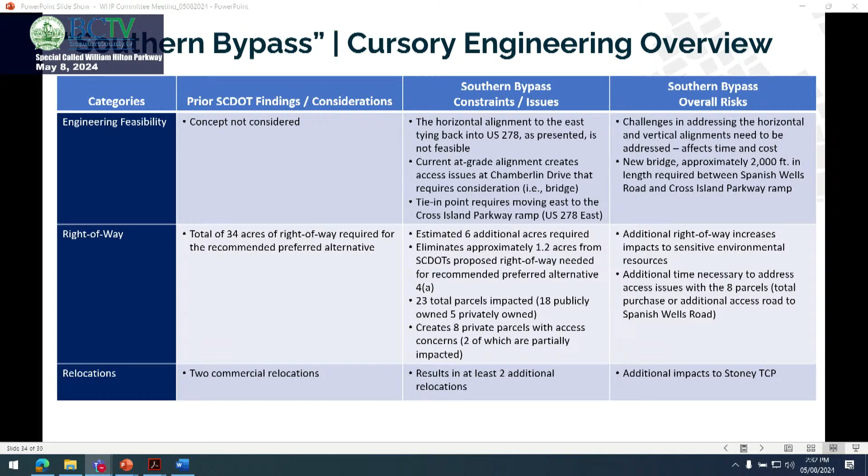Move on to Chad to give the overview of the environmental. Thanks, Lauren. Nate, you can go ahead and go past this slide, I just wanted it here in case we need a quick reference.

From an environmental perspective, a couple qualifiers to keep in mind before we get through this table. First, when looking at potential impacts from a high level like we are right now, and the risks associated with incorporation into SCDOT's project, it's important to recognize that the conceptual impacts are what we're looking at here, plus SCDOT's recommended preferred alternative. That's why it's important to give acknowledgement to SCDOT's previous findings and considerations, and why that is the first column in this table.

It's also important to recognize that NEPA and SCDOT did acknowledge this in their letter, and like Nate said at the beginning of his presentation, we did not receive a copy of that letter before this presentation and evaluation was pulled together. But the important thing to remember is that NEPA, including Section 106 and Section 4(f), does not consider public and privately owned properties differently. It's only concerned with how a project affects a specific resource.

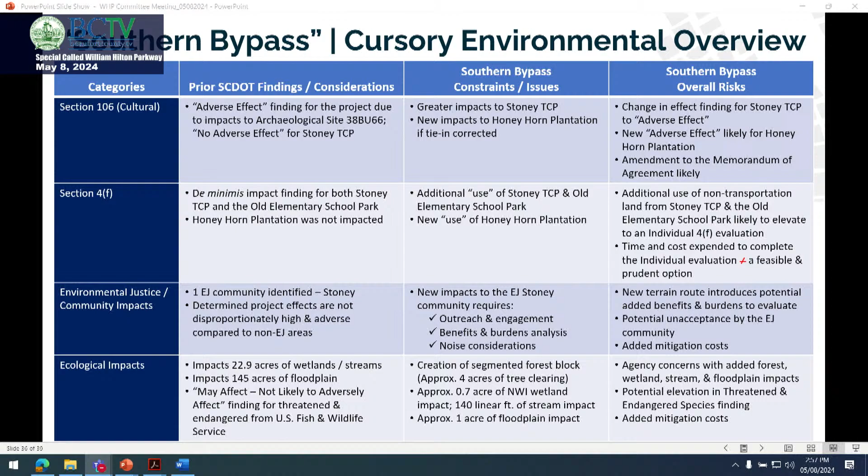So, I understand the point of moving traffic faster, but the faster we move it, we're just creating that bottleneck somewhere else. So if we're able to spread it out, it does go hand in hand with slowing speed down through that area, through all areas actually. And yes, I'll have a hard time adhering to that, but it'll help alleviate some of those traffic jams. And that's kind of my question, and I'm asking for the expert opinion on that.

And that's consistent with some previous work that was done. There was modeling that eliminated the signals altogether and created a free flow condition. Surprisingly enough, even at the Windmill Harbor intersection, before a light was put in, there still would be stoppage in traffic due to congestion in the system that would create a break in traffic and people would still turn. So I just want to make sure. I think if we're following the evaluation from Lochmueller and other technical documents, lights are part of the system, but they are not in and of themselves the biggest issue in the corridor.

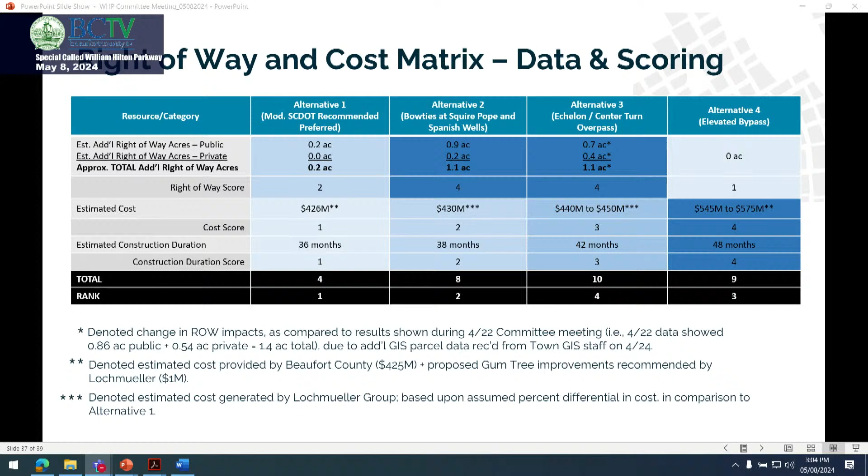On the final scoring matrix, taking that new score for right-of-way, and not to go too far into the weeds, the minor change with the right-of-way means the parcels themselves did not change, it's just the quantity of public and private. So Chad took a look at that with his staff, and these numbers switched slightly. Alternative 2 used to be ranked a 2 previously, now it's a 3, and conversely here for alternative 4 -- when you do the summation of these, if you recall at the last meeting, alternative 2 was ranked at... I had that noted down there, I'm glad I did that.

It was ranked at a 22 and it was tied with alternative 4. Now you can see the differences in scoring, and so just the way things shook out, this is the new scoring. We just want to be transparent with the information we provided, and this is the new matrix that's included in our draft summary findings memo that you all were presented on Friday.

We've had this discussion before, but I'm okay with grading per subject. You can compare that. But I am fundamentally opposed to adding them up. And as a professional firm, you should be too. I'm doubting that. You cannot do that.

This is what we have done in previous projects in different states, and I wholeheartedly agree that certain committees and members may weight different things differently. This was just a discussion point to help whittle down and how we chose them. But this is what we've done in the past.

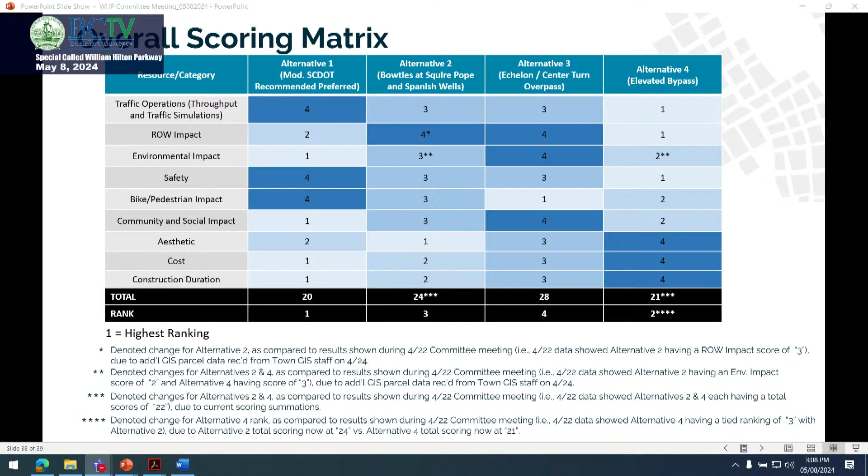The agreed upon scope of work asked for the consultant to determine a way to evaluate. It did not say exactly how to do that. It had some elements that needed to be included in the evaluation, which they are. But again, they're executing against the scope of work. We can question some of the conclusions and findings that they have made or presented, but the goal of this committee is to make sure that the project is being executed against that scope of work.

And when you ask someone to do an independent review and, based on engineering, provide you information, and they've done it according to the scope of work, you can disagree with some of their conclusions, but the methodology is, I understand Sean, different, but...

It's that if you add it all up and you get a 24 and a 20, then people are going to say, well, I might go for the 20. And I think that yes, you need to have a measuring stick, but then there needs to be another layer on top of it. I don't know how others describe it, but it's wrong to draw conclusions on the numbers. So there's got to be a descriptive element.